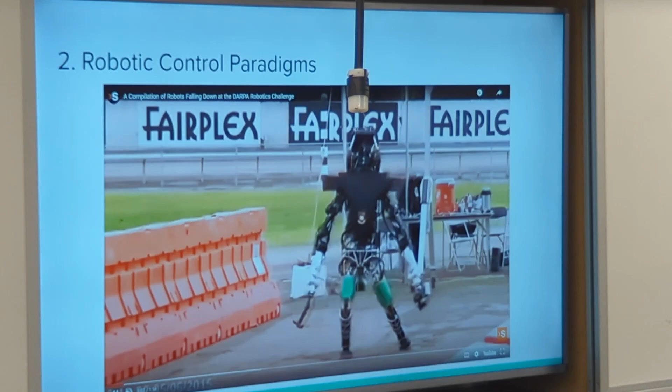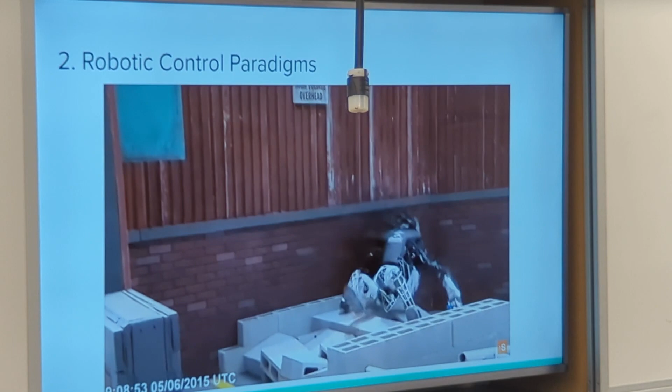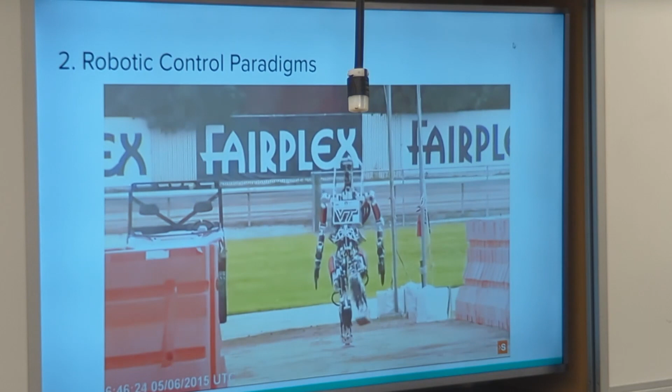So let's talk a little bit about robotic control paradigms. And this is from a theoretical standpoint. This is a great video from the DARPA Robotics Challenge. And yes, even robotics engineers find this hard. Bonk. Yeah, the tasks here were many and varied. You had to drive a car, you had to open a door, you had to turn a valve, you had to climb stairs. It wasn't pretty.

All right, so what do I mean when I say a paradigm? Well, a paradigm is a way that you structure a robot's code. A robot is supposed to perform an action that allows it to achieve a goal. The hard part is figuring out what actions it should take. That can be very simple, such as extend your arm, or it could be very complicated: score a point at the other end of the field.

Historically, there have been various attempts at creating robotic architectures that create sort of intelligent behavior without explicitly programming it in. And that's ultimately the goal in a lot of early robotics. How do you program something that, quote unquote, thinks for itself? This is somewhat applicable to FIRST robotics. No one's going to build a fully autonomous FIRST robot, but bear with me. The history gets interesting. So your sort of 0th level is remote control.

It's super simple. Most of you could program this in about 10 minutes. It's very flexible. It's only dependent upon you hitting a button. But it really requires that your drivers are extremely good and you spend a lot of time practicing. And then, of course, once you practice and get it down pat, you go out onto the field and try to do it during competition and you fail miserably trying to line up a goal that's 30 feet away and has an error of about an inch. So this is kind of not robotics. This is a fancy RC car. Again, this is where most people start, and that's fine, but I think we can do better.

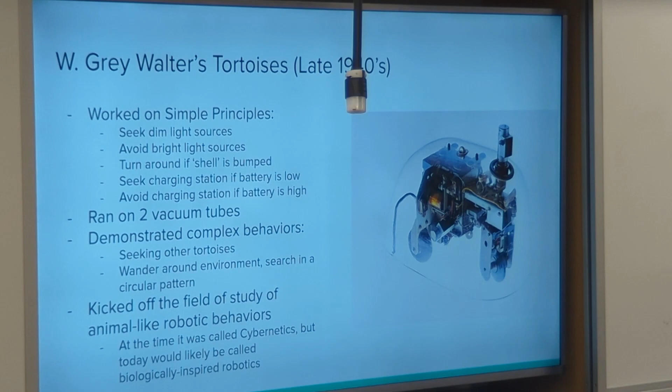So at the other end of the spectrum, we have the deliberative paradigm. This is also known as the hierarchical paradigm. This is known as sense, perceive, plan, act, or sense, plan, act if you're a little older. It's flexible in the sense that you don't specifically have to tell the robot what to do. It's fast as compared to driving it yourself. It's slow as compared to reactive. But it's extremely complex and extremely finicky.

So deliberative is more like what you would think about when you think about how does a robot do a thing. A very common example is a key is on the table. Go get the key. So first the robot says, well, what's a key? Well, I know what a key is. Good. That's something that has been programmed into me. What's a table? I know what a table is. Can I sense the key? Yes, it is on the table. Will the key move? No. The thing I know about keys is they don't move unless they're moved.

Now I need to plan a way to drive toward the table and reach out and grab the key. And it will figure all this out, it'll think about it really hard, and then it will do it. As you can imagine, it's really, really hard to do that. I mean, just the physics modeling of figuring out if I reach out, is my arm going to whack into the table, that alone is an extremely difficult problem.

And this was really sort of pioneered in the late 60s, back when the computers, they were okay, but you're not going to do crazy things with them. So we had Shakey the robot. This was the first robot that really sort of exemplified this. And Shakey was kind of interesting.

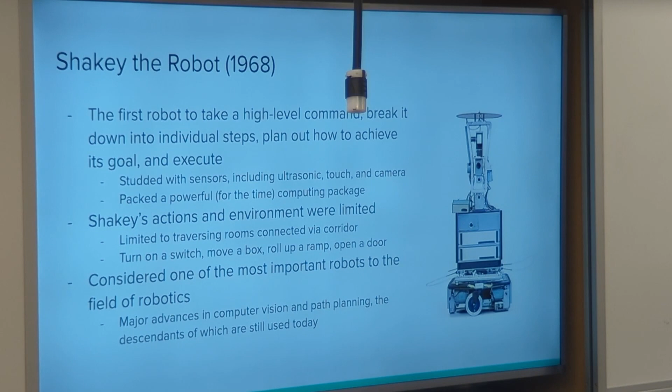But its environment was extremely simple and extremely engineered. You couldn't just put it outside and say, go find an arbitrary light switch and turn it off. It had to know everything about its environment in order to make it work.

So you put these two together, and this is a pretty common thing. You get the hybrid paradigm. The idea is that you have sort of these low-level reactive things that allow it to act faster than sitting and thinking about it. But at the same time, you have the ability to sort of sit and think about what you want to do.

So it's sort of like if you are walking around the kitchen looking for your keys, at the same time you could be planning your drive to work. You have the low-level stuff that takes care of the things that you have to do, while you have the high-level stuff that thinks about what you want to do.

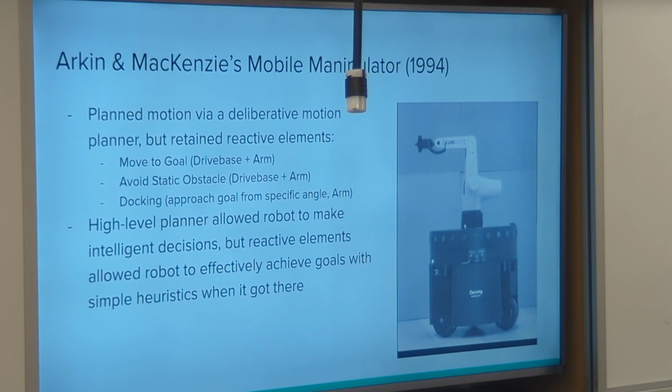And there are examples of this. I'm going to sort of speed through this in this case. This was very popular in the late to mid-90s.

There's also another paradigm out there called the subsumption paradigm. And that was the idea that, well, reactive really had a good idea there. Obviously, we can get some pretty complex behaviors out of robots just by stacking together all these reactive elements. But really stacking a bunch of them and expecting a complex behavior out of it was asking a little too much. So what if we made a low-level controller that said, I'm going to do nothing but make sure I don't run into anything.

That's all I do. And then you do a higher level controller on top of that that says, I want to wander around. But it still defers to that first level controller that says, I don't want to run into anything. The nice thing about this is it's pretty modular. You can stack more and more complex behaviors on top of one another. But at the end of the day, in order to do really complex behaviors, you really need a planner. And just stacking simple controllers on top of one another didn't really get you very far.

This was popularized in 1985 by Rodney Brooks of MIT. And you'd have to ask him, but generally speaking, the consensus is between that and reactive paradigms, it really set the field back by about 20 years.

So to recap, early robotics, mostly reactive. They were very simple. They mimicked animals and insects. Later, roboticists said, well, let's go top down. Let's think about defining the entire world in terms of, in this case, it was known as symbolic AI. Let's define what the entire world looks like to the robot and let the robot really, really think about what it wants to do. But it turns out that's really hard to do. In essence, what has happened is that big computing and machine learning has come along and really saved deliberative.

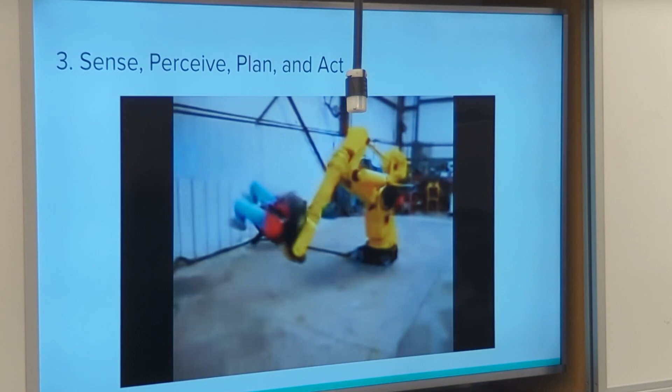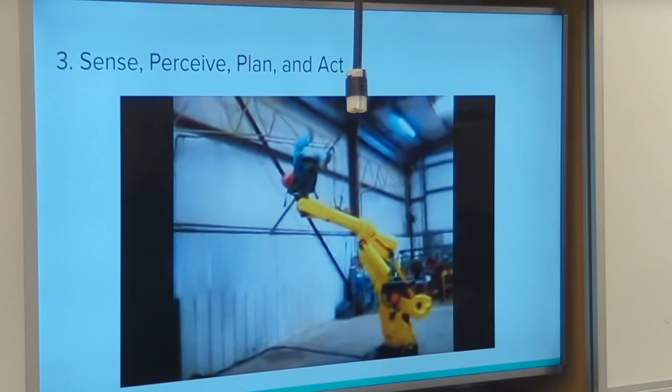And before we move on, I do want to pause briefly for questions and also to recognize how close that man came to being decapitated. Nothing? All right.

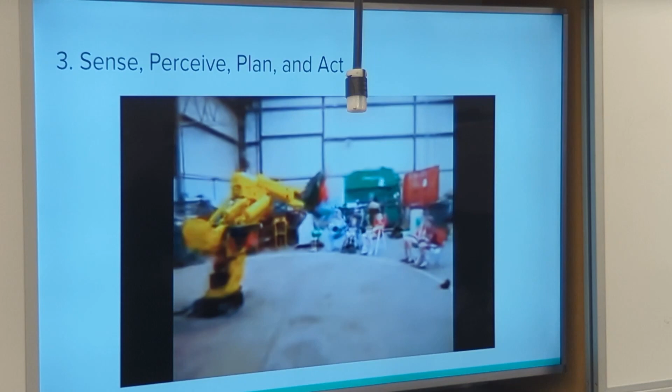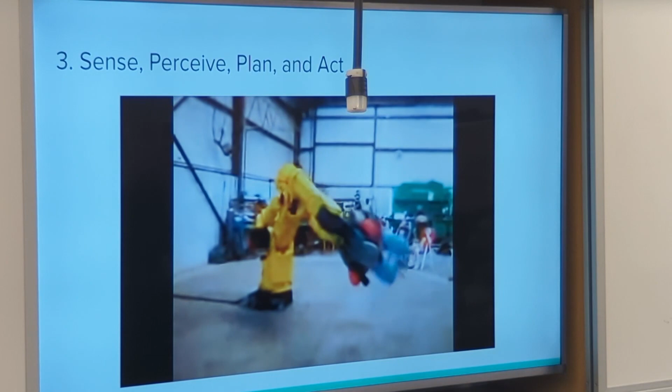Yeah. Just one thing about the reactive control. I think you're using reactive control in a slightly different way than I would think of reactive control as closed loop control, because at the very bottom you're still doing in some ways closed loop control on your motors and stuff. Are you saying there are other algorithms? I mean, even state-based control in a way is a feedback control. It's a little more intelligent feed forward in some ways, right?

I'd agree. And so you're still doing reactive control even with all these other ones in that sense, but maybe not in the other sense that you mean, which I'm not sure I completely got. You run into a lot of nomenclature issues, particularly in this sort of thing where everything runs together. I had a professor once who was talking to me about adaptive control. I was like, what is an adaptive control? Well, technically a PID controller adapts. But yeah. So I think you're correct.

I think the way to think about it is that usually a closed loop controller is used to make a robot act more like a model. Whereas these are trying to create particular behaviors by saying, based on the model of my world, I think I want to do this. So it's a slightly higher level. So if you look at the way the industry looks at controls, there are levels, right? Absolutely. The bottom level is the control the thing level. Yep. And the levels above that are... Yeah. And so the bottom level is still the bottom level.

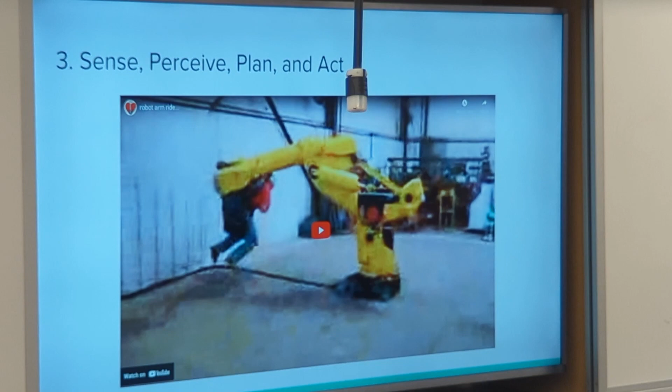And you could say in a reactive control, for instance, when this sensor is touched or it goes off, set my velocity control loop target to X. And that would still technically be a reactive paradigm with a closed loop controller on it. I just wanted to make sure I understood. Oh, absolutely. Thank you.

So what is sensing? Well, that's kind of a trite question, but let's be specific about it. Technically speaking, a sensor is a device that creates a signal in response to